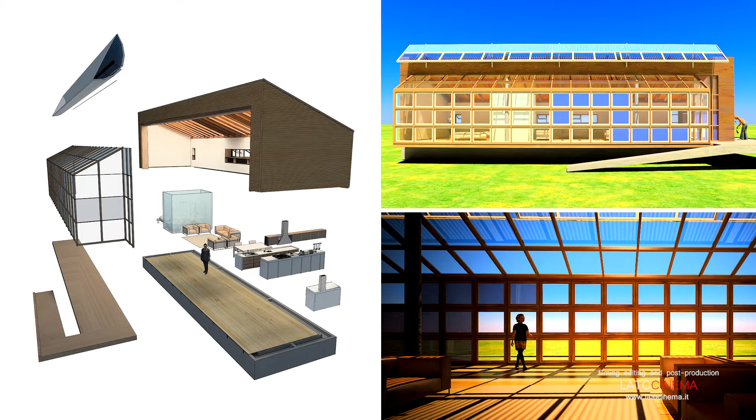Residential buildings are responsible for almost half of the global yearly building energy consumption. Thus, improving energy efficiency of houses is critical in addressing the global energy challenge. In collaboration with the Fondazione Bruno Kessler, the Connected Sustainable Home is the brainchild of the MIT Mobile Experience Laboratory and aims to bring the home of the future to fruition.

In the past 4 years, we systematically examined key architectural elements of houses, such as the wall, floor, window, and ceiling. The Connected Sustainable Home prototype can achieve drastic gains in energy efficiency by parallel deployment of 4 technologies: passive high thermal mass materials, electroactive materials, clean energy production systems, and a model-based control system integrated with the intelligence necessary to implement a wide range of long-term energy optimization strategies.

We seek through this project to pioneer new methods in building that are in harmony with the environment and employ the latest technological innovations.

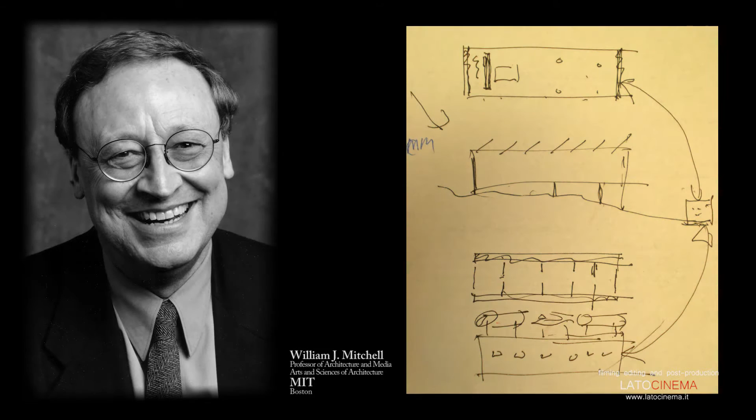William J. Mitchell, 1944 to 2010, pioneered cross-disciplinary research and design and set the general vision of connected sustainability. His ideas included combining physical with computing architecture to improve energy management, and in the spirit of early farm communities, proposed sustainability through collaboration on a community and urban level.

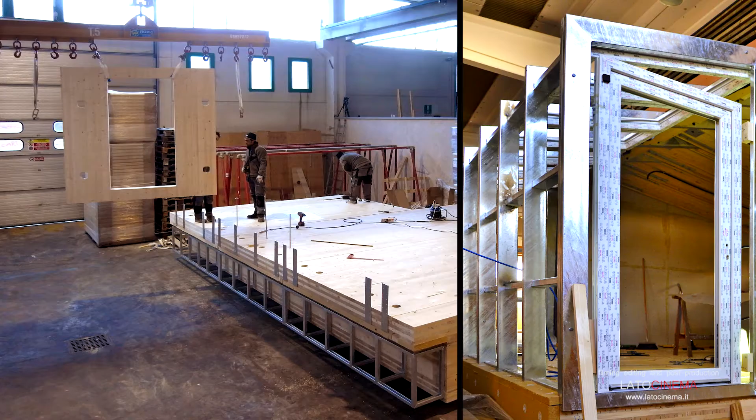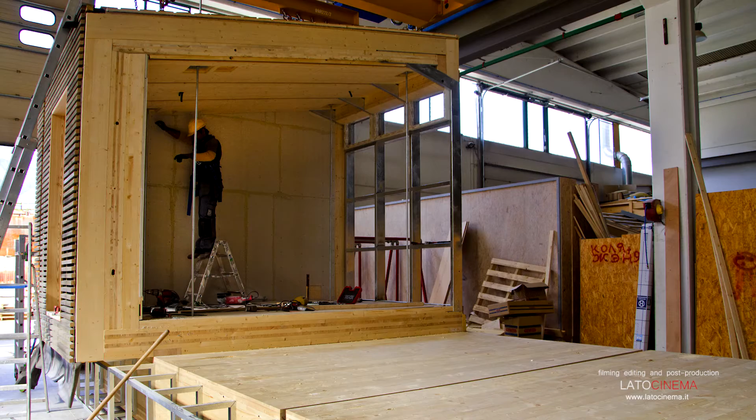The spatial arrangement of the house is organized in modules that can be combined in alternative ways. The current version of the prototype is the minimal configuration of 3 spatial modules accommodating basic house utilities such as living, sleeping, and eating. These were produced in collaboration with IVALSA, the Trees and Timber Institute of National Research Council of Italy. They are prefabricated in the workshop and then transported to the site for assembly.

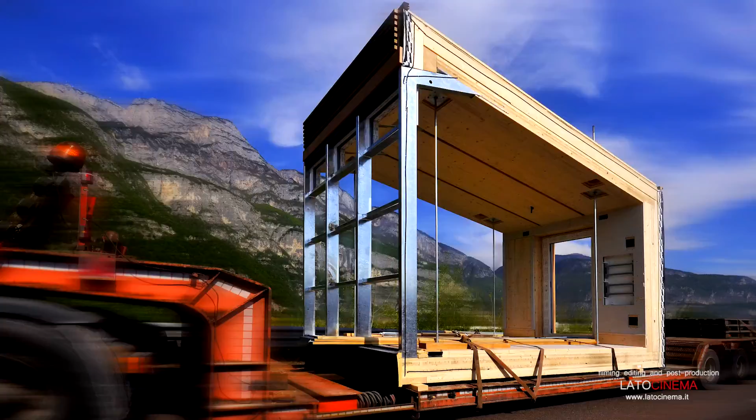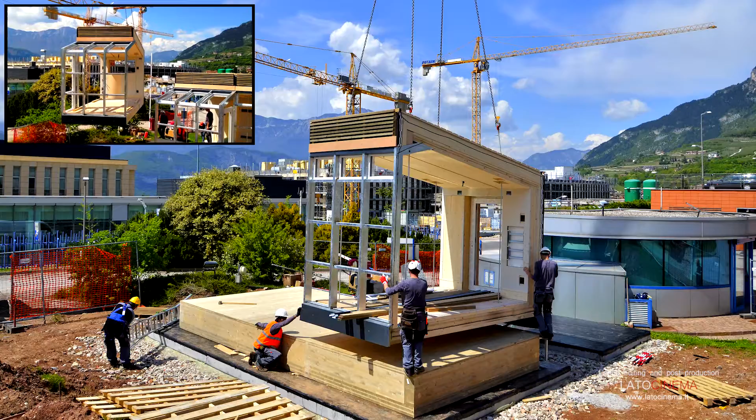The modules were designed to satisfy the requirements of transportability. This includes the safe lifting and easy maneuverability of components and dimensions necessary to fit into a standard shipping container. This overall module and transportable building system, designed by MEL and IVALSA, demonstrates a way to use wood, a natural material, to build contemporary, prefabricated high-tech structures in a manner more economical, light, and environmentally friendly than conventional construction.

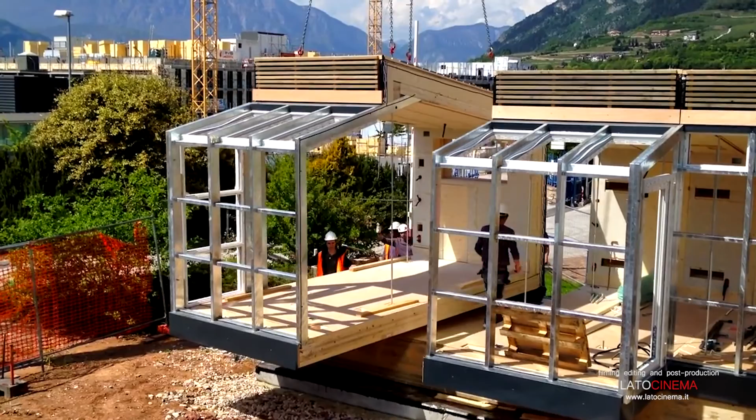The dynamic facade covering the south elevation of the prototype is a programmable surface that adapts to changing weather conditions and personal preferences. It's a matrix of 3x9 digitally controlled windows able to regulate air, daylight, and heat flow. Each window pane is an overlay of 2 electronically switchable materials, a polymer dispersed liquid crystal film that can render a window transparent or opaque to visible light, securing privacy, and a SAGE electrochromic layer controlling the degree of solar penetration, securing thermal performance and light illuminance.

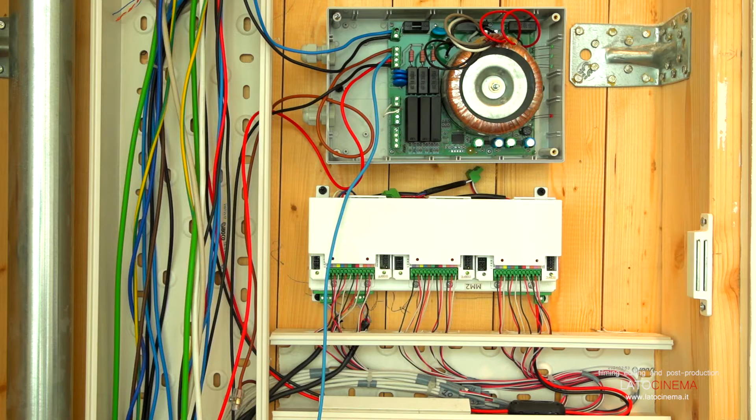An electronic actuator can adjust the permeability of airflow through an automated window opening and closing mechanism. The facade eliminates the need for traditional blinds and shutter systems and revolutionizes building performance and aesthetics.

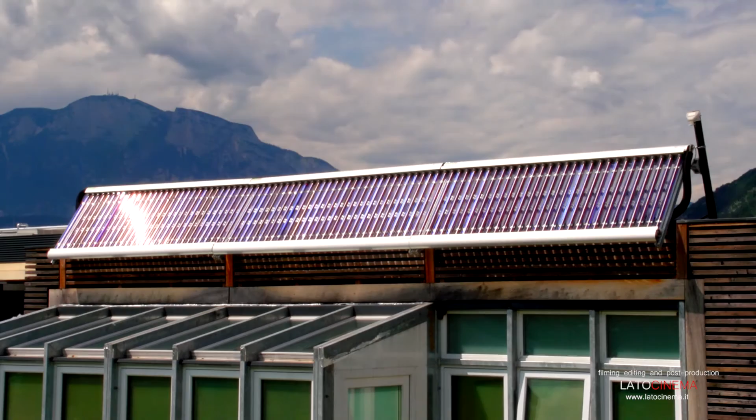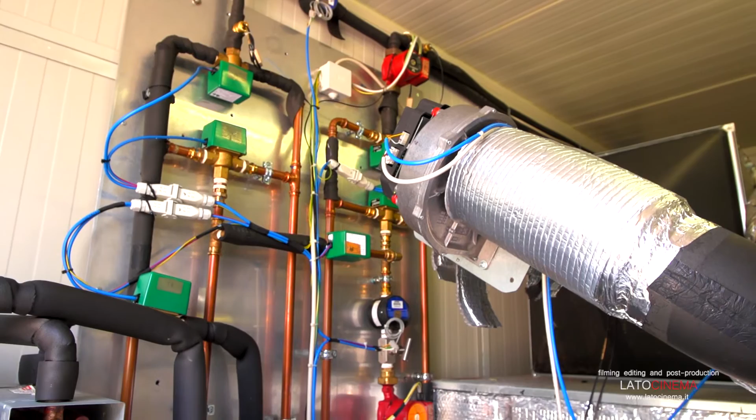The energy system of the prototype combines multiple renewable energy sources and conversion technologies. The 5 subcomponents are a photovoltaic solar system including PV panels and solar tubes, a solid thermal storage component, a liquid thermal storage component, a pellet cogeneration boiler for the production of thermal energy and electricity, and finally, a hydraulic system serving the distribution of energy and fluids on the components of technological apparatus and the indoor building environments.

Thermal power is provided to the house by air in both cases of cooling and heating. The system does not include an electrical energy storage unit, so the produced electricity is consumed in the house or sent to the grid. The control system of the prototype, developed by MIT Model-Based Embedded and Robotic Systems Group, reduces energy consumption and enhances comfort.

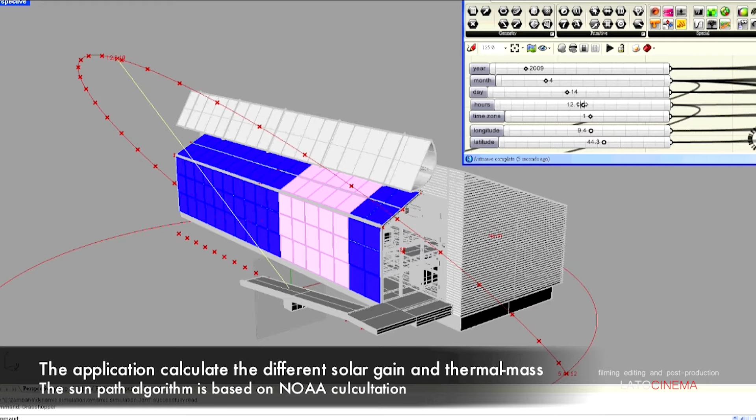The artificial intelligence methods of building control were used in implementing an online risk-sensitive planner for the house called pSulu. The controller fulfills 3 missions. First, it adapts the management of energy to activities of the residents by allowing the residents to input a detailed schedule and desired comfort ranges.

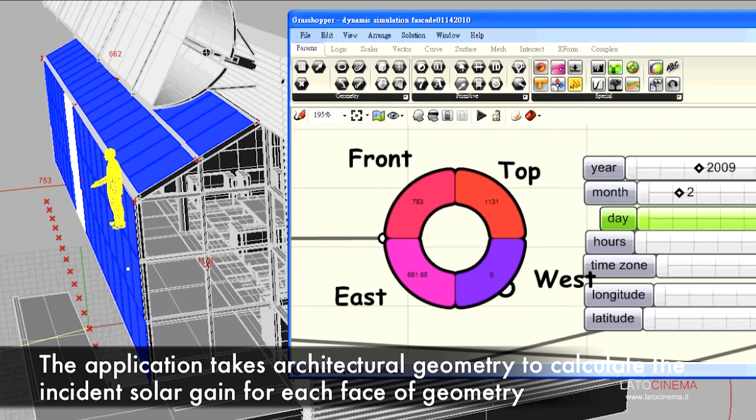Second, it optimizes operation of the HVAC system, dynamic windows, and thermal conservation capabilities of the envelope to limit consumption of electricity. And lastly, it provides a probabilistic guarantee that the residents' comfort constraints will be respected by acknowledging sources of uncertainty and planning accordingly.

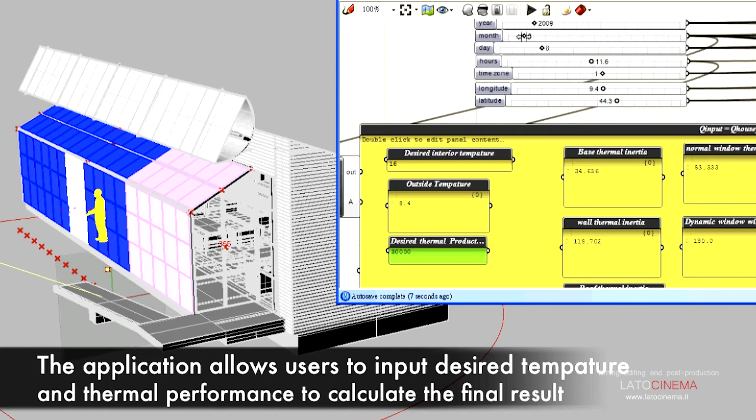A wide spectrum of future projects and applications can be developed based on the already implemented systems of the prototype. Projects include the collection of post-monitoring data from prototype systems and performance evaluation, as well as security and deployment experiments of new sensory networks. Further development of the system's learning capacity of the control could cater to occupant needs in increasingly more effective ways.

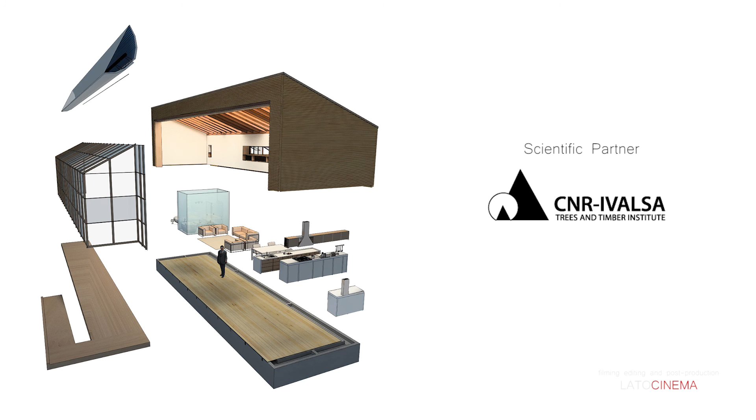Task optimization could be achieved by tracing use patterns, thus eliminating the necessity of user input. Real-time monitoring and statistical data of long-term use patterns could also provide a basis for prediction. As you can see, there's a large possibility of impactful projects that can be quickly realized from already implemented prototype systems.